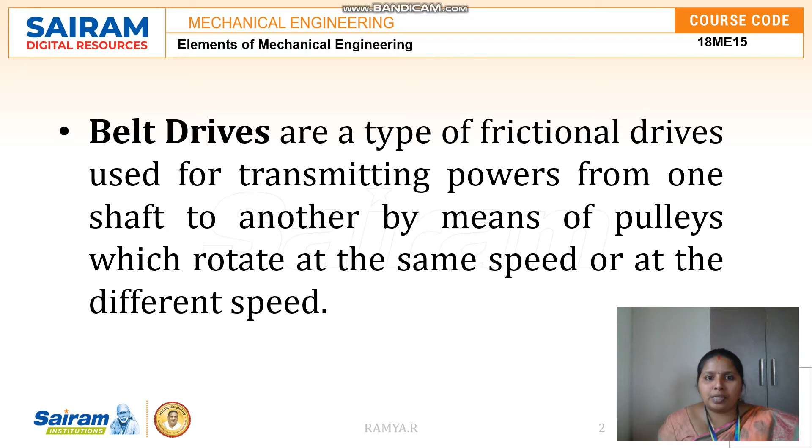In this video, we will be seeing about the belt drive. What is a belt drive? What are the materials used and what are the types of a belt drive? So belt drive is a type of frictional drive used for transmitting power from one shaft to another shaft by means of pulleys which rotate at the same speed or at a different speed. So belt drive is usually for transmitting power.

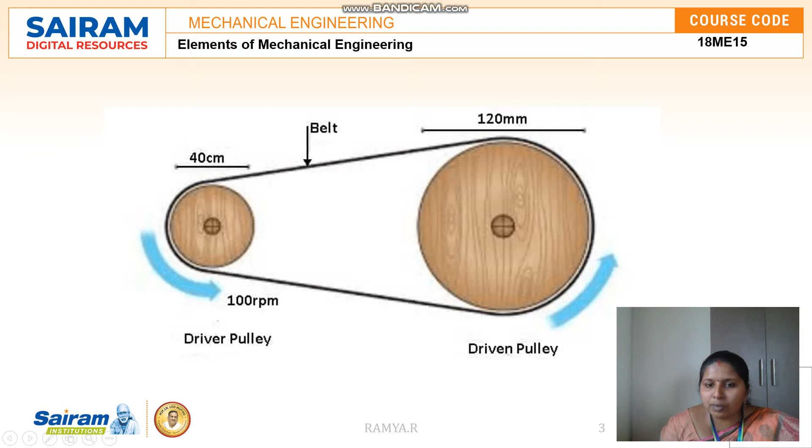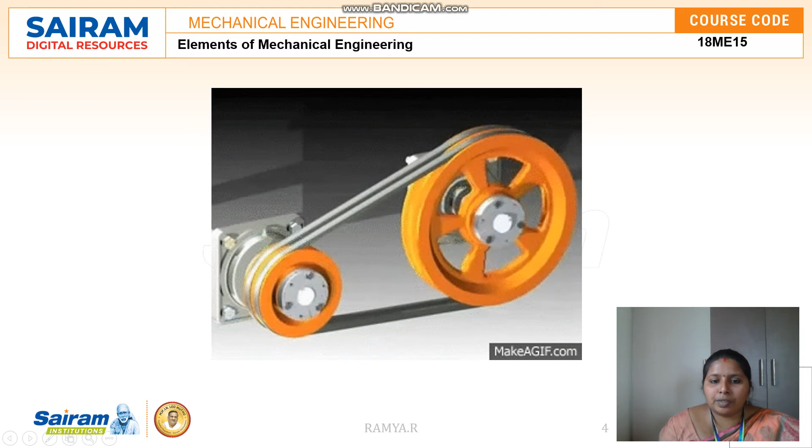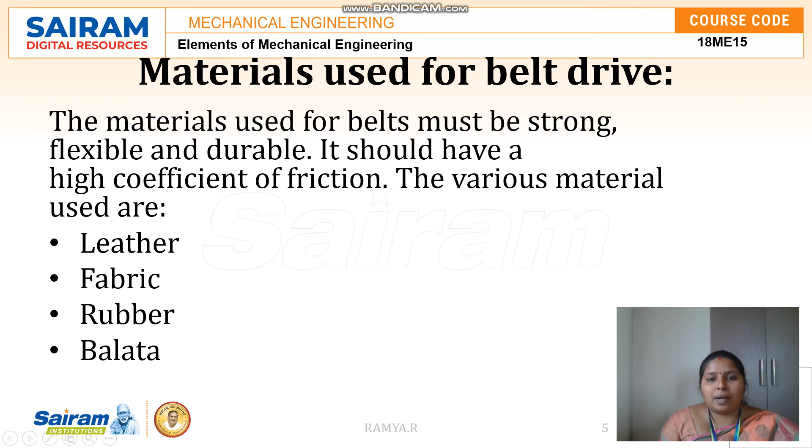These are some of the materials that are used for making a belt drive. The materials used for a belt must be strong, flexible and durable. It should have a high coefficient of friction, and the various materials are leather, fabric, rubber and balata. So first, leather may be oak tanned or mineral salt tanned, for example, chrome tanned. When the thickness of the belt required is more, two or more strips are cemented together. Leather belts require periodic cleaning.

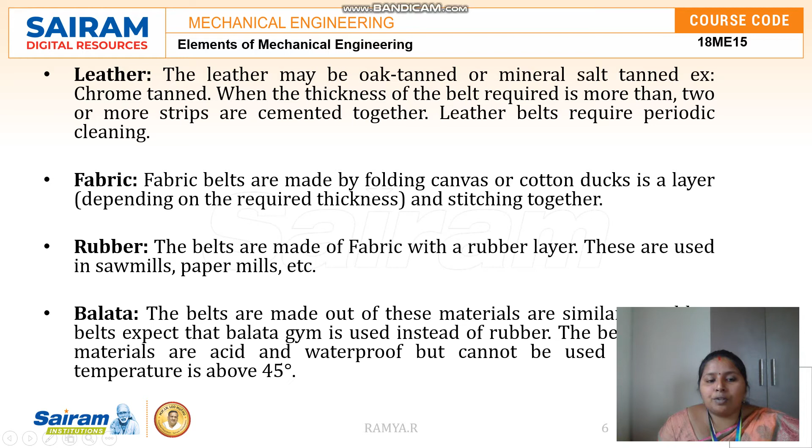Fabric belts are made by folding canvas or cotton duck in layers depending upon the thickness required and stitching them together. Rubber: the belts are made of fabric with a rubber layer. These are used in sawmills, paper mills, etc. And balata: belts made of this material are similar to rubber belts, except that balata gum is used instead of rubber. These belts are acid and waterproof but cannot be used where the temperature is above 45 degrees Celsius.

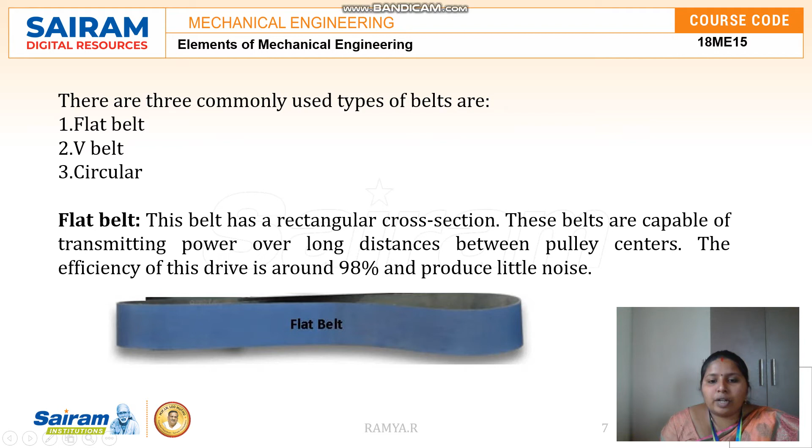So these are the commonly used types of belts: a flat belt, a V belt and a circular belt. So this is the image of a flat belt. The flat belt has a rectangular cross section. These belts are capable of transmitting power over long distances between pulley centers. The efficiency of this drive is around 98% and it produces little noise.

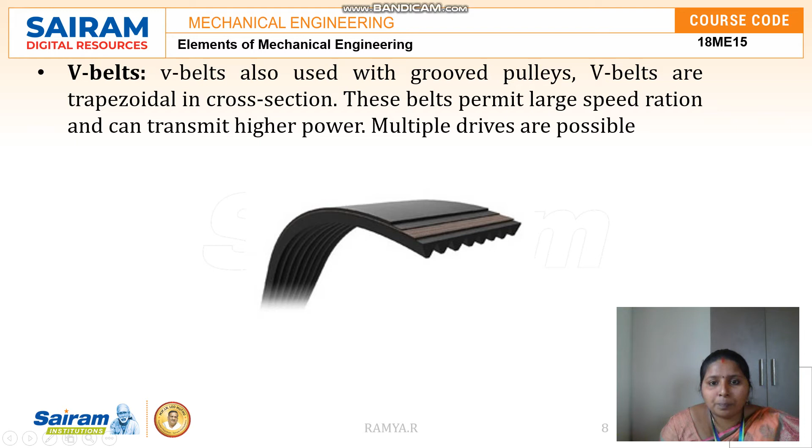Next one is a V belt. Here you can see the V shapes in the edges. V belts are used with grooved pulleys. V belts are trapezoidal in cross section. These belts permit a large speed ratio and can transmit high power. Multiple drives are possible. And the next one is a circular belt. This type of belt has a circular cross section and is used with grooved pulleys. So these are the types of belts.

Next is about the types of belt drives. There are 5 main types of belt drives: open belt drive, cross belt drive, stepped cone pulley or speed cone drive, fast and loose pulleys, and jockey pulley drive.

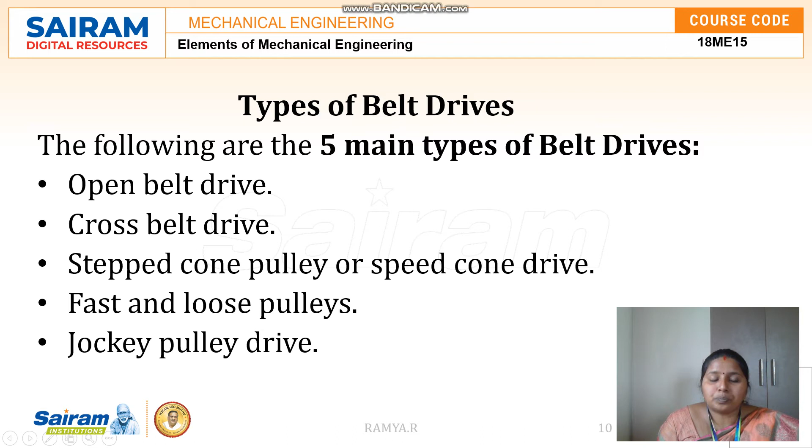The first one is the open belt drive. In this type, the belt is employed when two parallel shafts have to rotate in the same direction. When the shafts are far apart, the lower side of the belt should be the tight side and the upper side should be the slack side. This is because when the upper side becomes slack, it will sag due to its own weight and thus increase the arc of contact. So this is how an open belt drive is arranged.

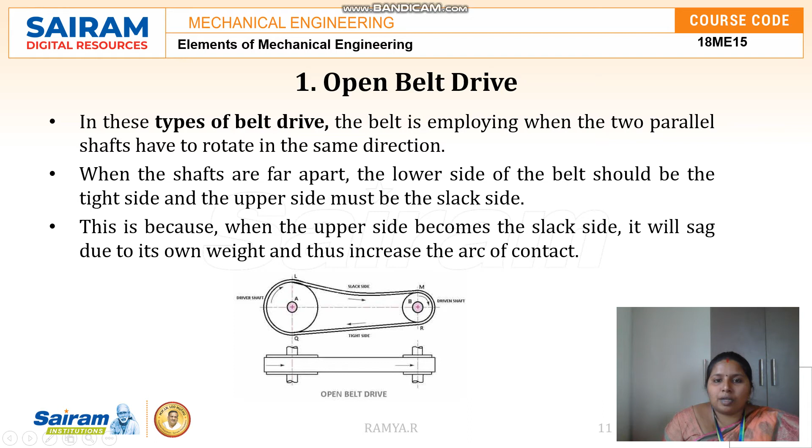The next one is the cross belt drive. In an open belt drive, both shafts rotate in the same direction, but in a cross belt drive, both shafts rotate in opposite directions. To maintain the arc of contact, the belt is crossed. At the junction where the belt crosses, it rubs against itself and wears off. To avoid excessive wear, the shafts must be placed at a maximum distance from each other and operated at very low speeds. You can see two shafts rotating in opposite directions with a cross in the belt.

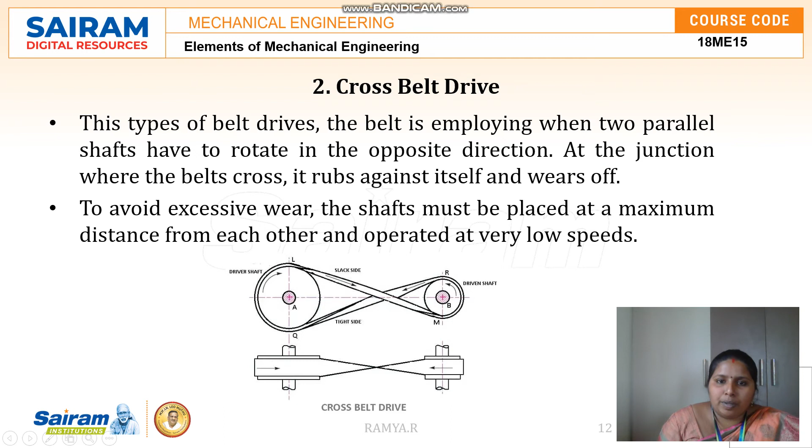Next is the stepped cone pulley or speed cone drive. This type of belt drive is used when the speed of the driven shaft has to be changed very frequently, as in machine tools such as lathes, drilling machines, etc. A stepped cone pulley is an integral casting having three pulleys of different sizes, one adjacent to the other. One set of stepped cones is mounted in reverse on the driven shaft.

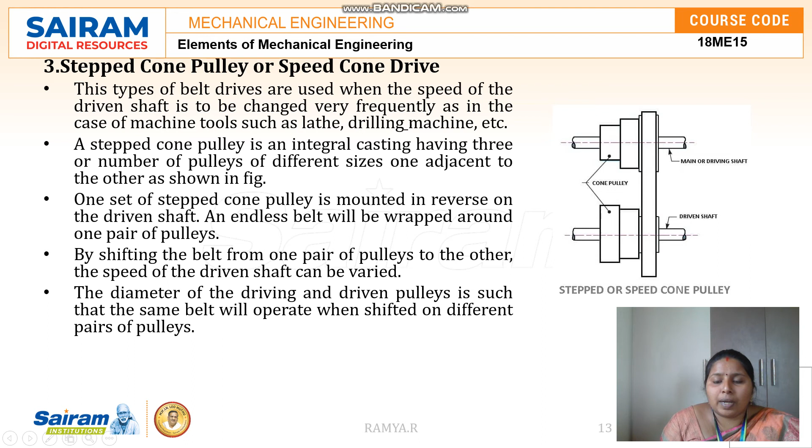An endless belt is wrapped around one pair of pulleys. By shifting the belt from one pair of pulleys to another, the speed of the driven shaft can be varied. The diameters of the driving and driven pulleys are such that the same belt will operate when shifted on different pairs of pulleys. So this is the schematic arrangement of a stepped or speed cone pulley.

Fast and loose pulley drive. This type of belt drive is used when the driven or machine shaft is to be started or stopped whenever desired without interfering with the driving shaft. A pulley which is keyed to the machine shaft is called a fast pulley and runs at the same speed as the machine shaft. A loose pulley runs freely over the machine shaft and is not capable of transmitting any power.

When the driven shaft is required to be stopped, the belt is pushed onto the loose pulley by means of a sliding bar having belt forks. So this is the arrangement of a fast and loose pulley. You can see the loose pulley, fast pulley and the machine shaft. And here is the driving pulley.

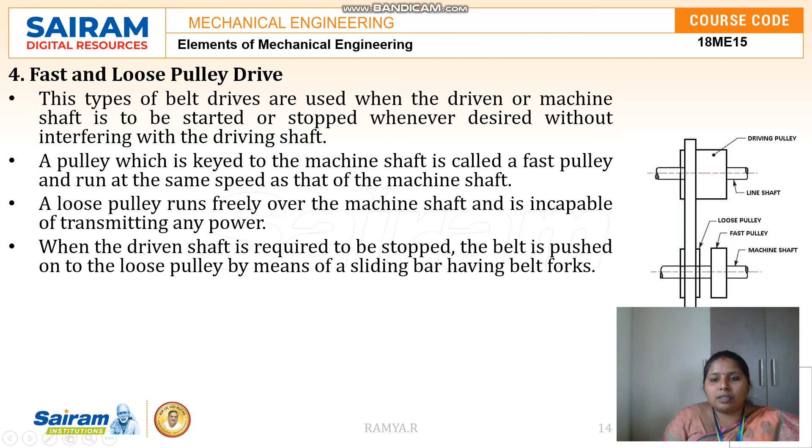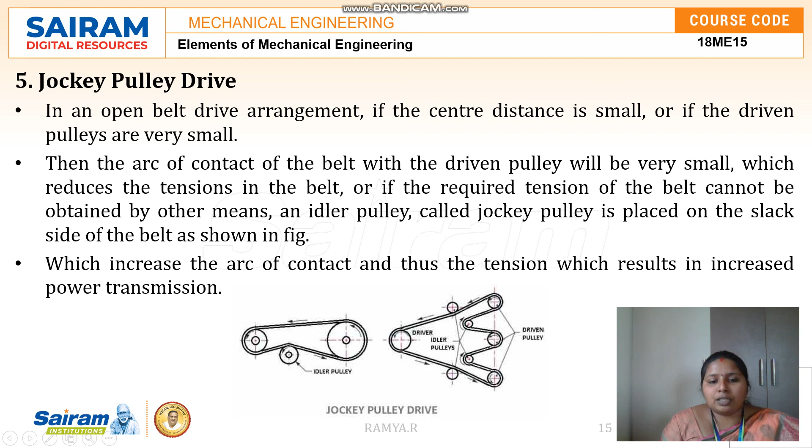And the last one is the jockey pulley drive. In an open belt drive arrangement, if the center distance is small or if the driven pulley is very small, then the arc of contact will be very small. In order to increase the arc of contact, an additional idler pulley is given. That is called the jockey pulley drive. So this is the open belt drive, but with an additional idler pulley to increase the arc of contact.

So this is about the different types of belt drives, the different types of belts, and the materials used for belt drives. Okay, thank you.